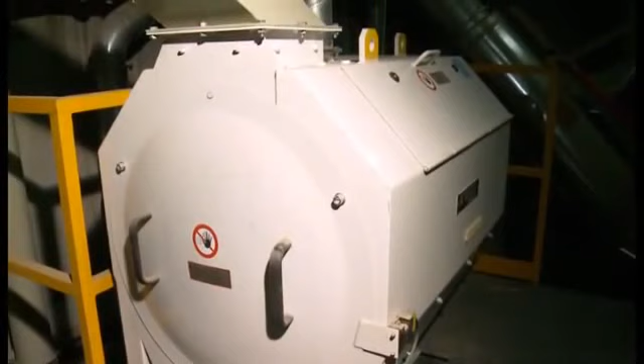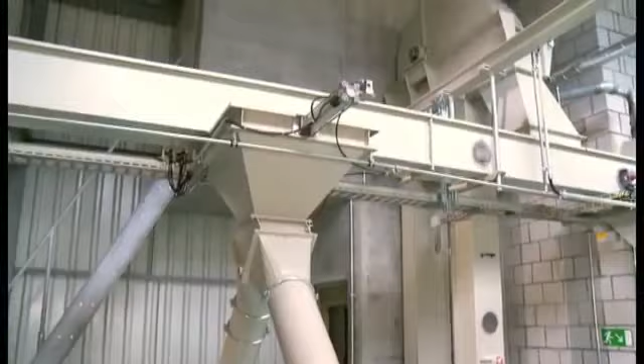...and weighed before being stored in the grain silo. Coarse impurities are separated by a drum sieve, and low-density matter by air in an aspiration channel. Then the grain is moved by mechanical conveyors, such as elevators and chain conveyors, to the appropriate storage bins.

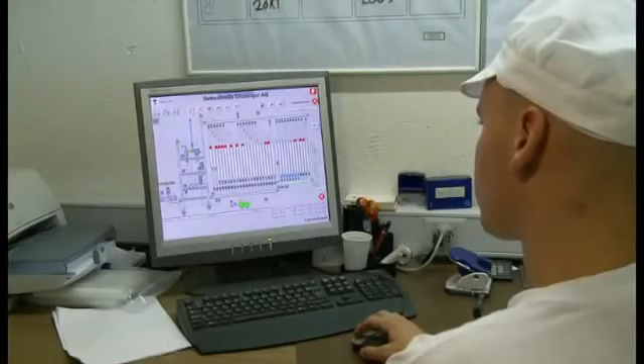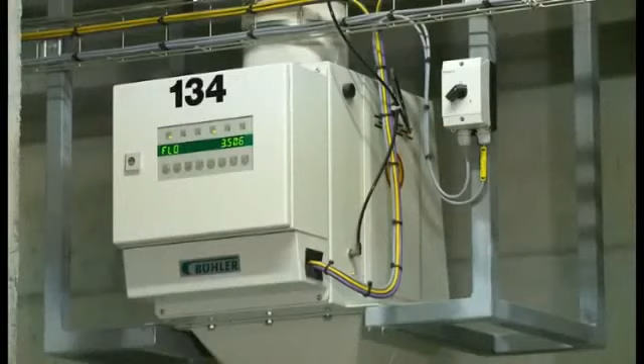The two grain silos together have a storage capacity of 12,000 metric tons. Grain storage is controlled and monitored from the control room. The different grain varieties and qualities are extracted from the raw grain bins at a controlled rate by flow balancers and then blended. This process is enormously important because it allows quality variations in the grain to be evened out.

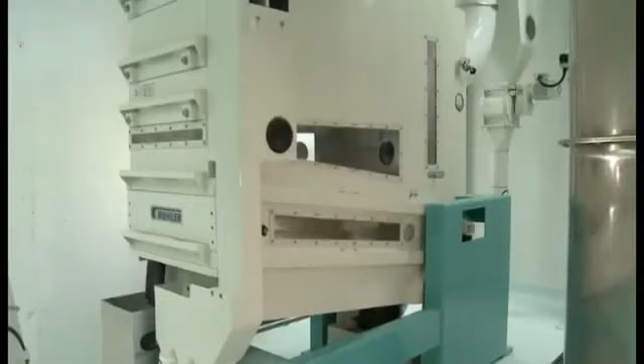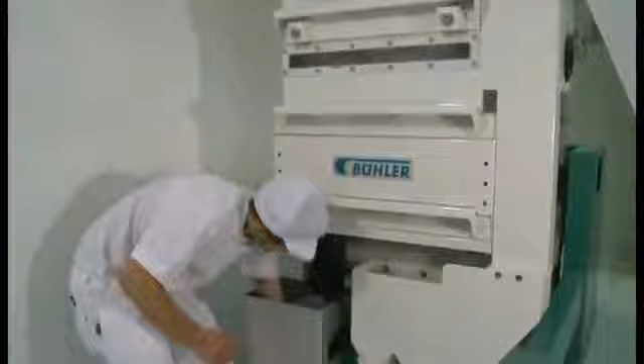The grain blend is then subjected to intensive cleaning. The combi cleaner used for this purpose performs 4 operations: separation, grading, removal of stones, removal of low-density matter.

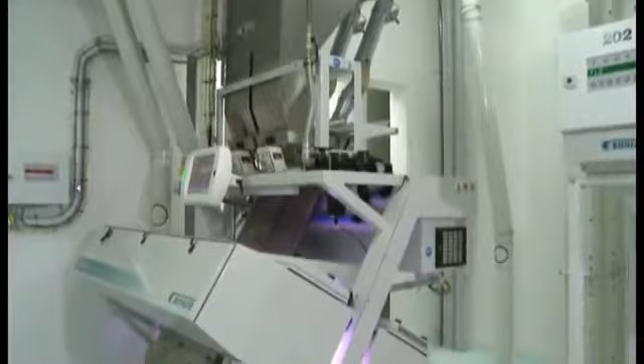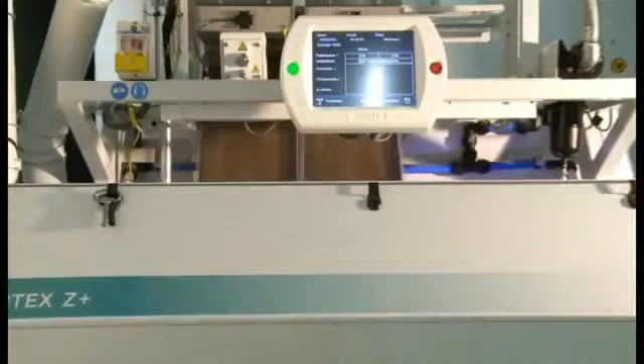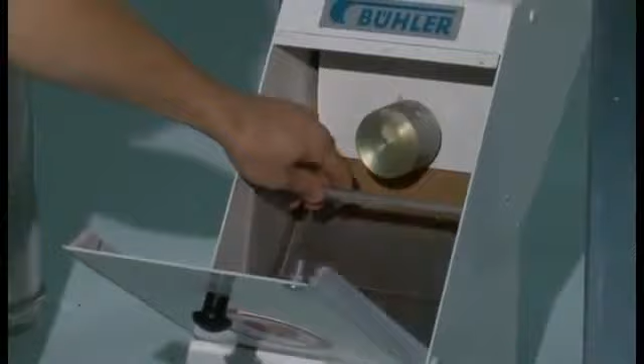Another very important grain cleaning machine is the optical sorter from Buhler Sortex, which is equipped with cutting-edge camera technology. This allows it very efficiently to separate impurities whose colour and surface appearance differ from the main product, for example other seeds or grains with discoloured germs. In addition, magnetic separators retain any metal particles so that they will not reach the grinding system.

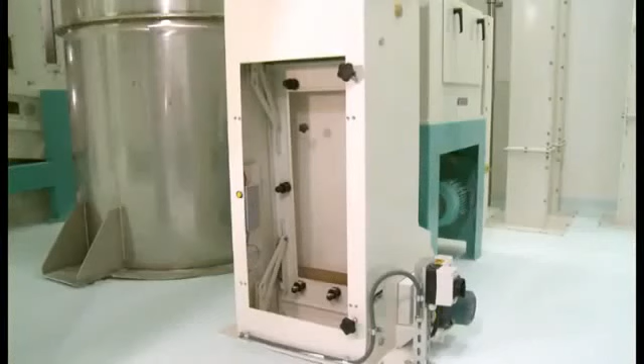Before grinding, the grain is dampened to a moisture content of about 16.5% to create the best possible grinding conditions. In order to allow the water to disperse uniformly throughout the individual grains, a tempering time of up to 36 hours is required, depending on their hardness. After final scouring to remove detached hull particles and another weighing cycle, the conditioned grain is transferred to the grinding system. All the equipment is controlled from the control center inside the mill building, from cleaning and grinding to storage in the flour silo.

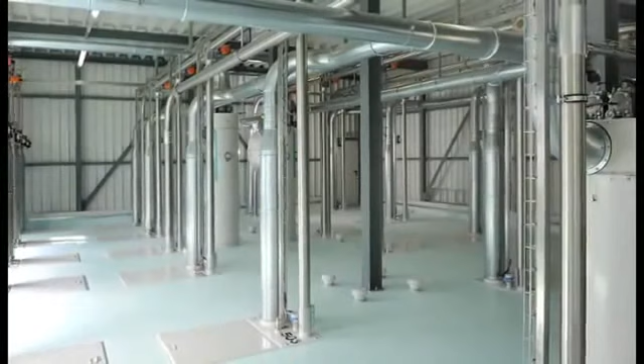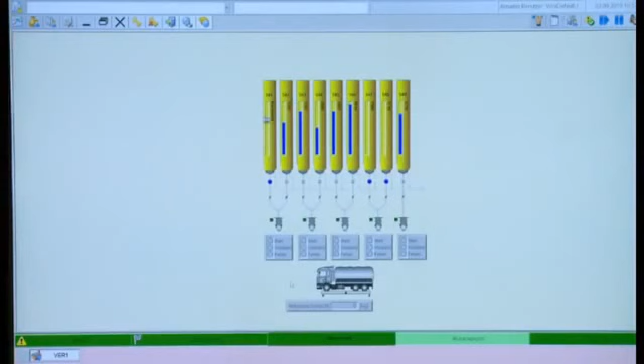The WinCos R2 process automation system used for this purpose is matched to the needs of the mill. It fulfills the high control and monitoring requirements of the plant. The processes are visualized on a display screen. They can, whenever necessary, be viewed by the miller and be adjusted to suit the job being processed. WinCos R2 also ensures 100% product interlocking, ruling out undesirable product cross-contamination. All the job data is saved in the system for several months. This allows accurate product retracing from the grain silo through to the bagging and packaging lines.

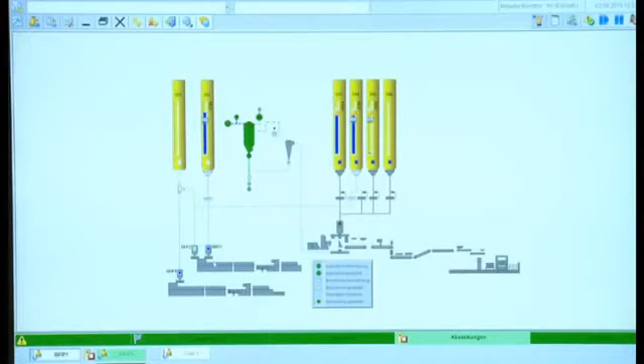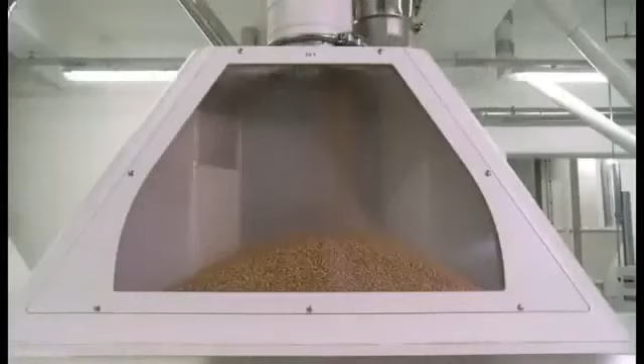The state-of-the-art roller mills form the heart of the mill. They are characterized by their round-the-clock automatic operation. In an initial grinding phase, the grains are cracked open on roller mills equipped with fluted rollers, resulting in a product mix made up of different particle sizes.

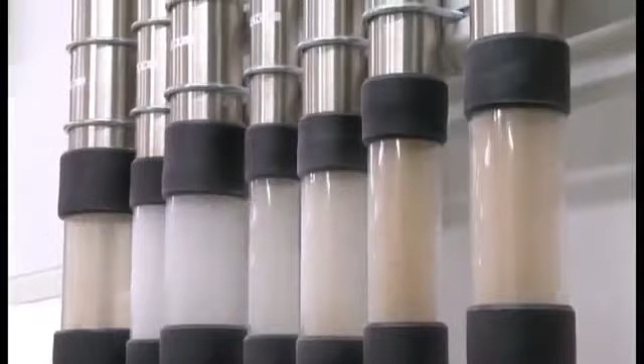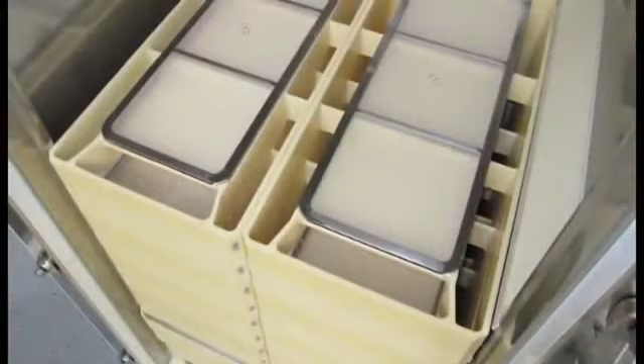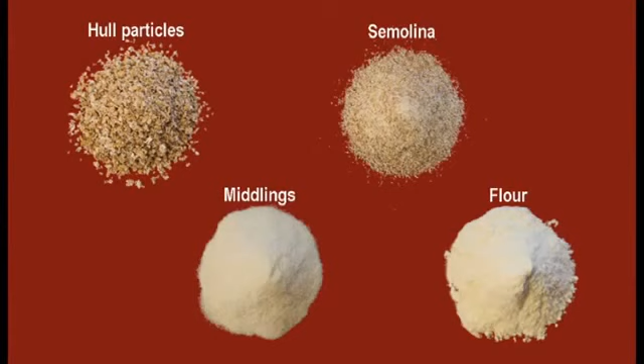After being pneumatically lifted and separated from the air by cyclone separators, the mix is fed to sifters for grading. Their numerous stacked sieves are provided with different mesh sizes. The sieves grade the product mix by size into different groups, such as hull particles, semolina, middlings, and flour. Using screens and air, purifiers separate the semolina and middlings a second time into a pure group and a group containing hulls.

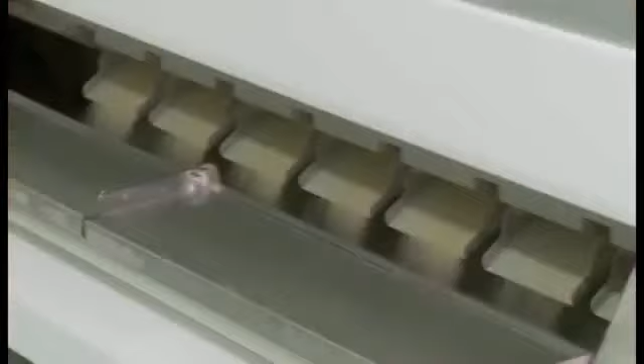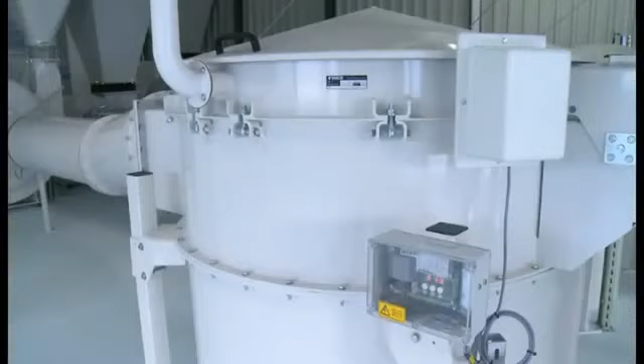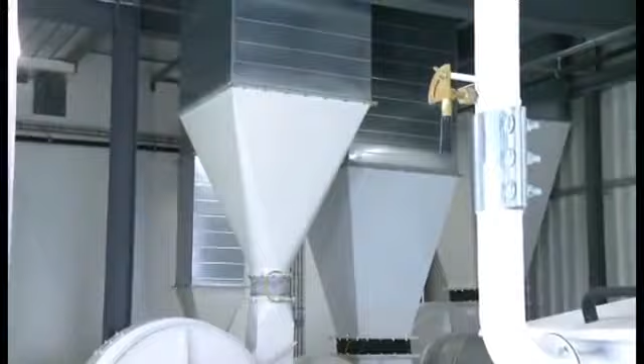The pure semolina and middlings are directed to additional roller mills equipped with smooth rolls, where they are reduced to flour. The hulls, which are called bran, undergo further processing into animal feed in the adjacent feed mill. High-efficiency dust filter systems clean the process air, which is discharged into the atmosphere or back into the building. Silencers allow the air to be discharged from the building with little noise.

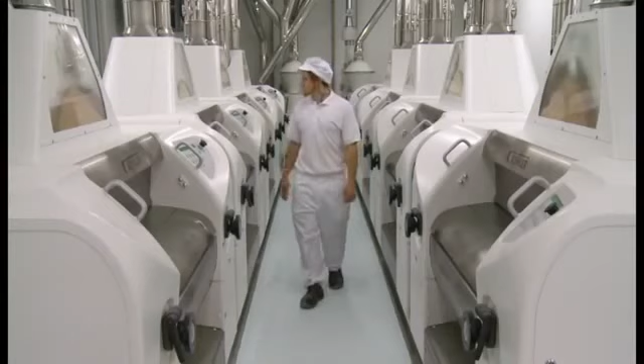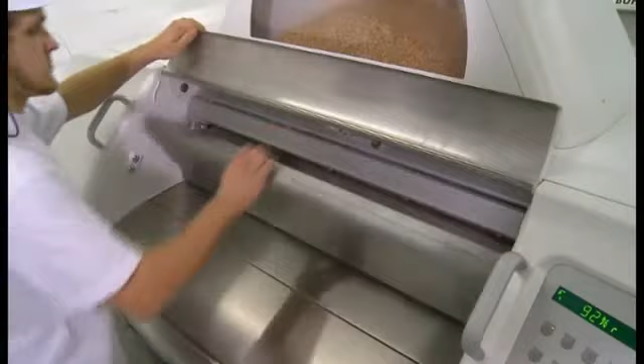The fairly complex grinding process is made up of numerous different stages. It is the miller's task to apply his specialist skills and to adjust the grinding equipment so that the grist yields a high extraction rate of bright, speck-free flours. He must also correctly blend the millstream flours obtained during grinding so that they will satisfy the end product requirements and quality characteristics.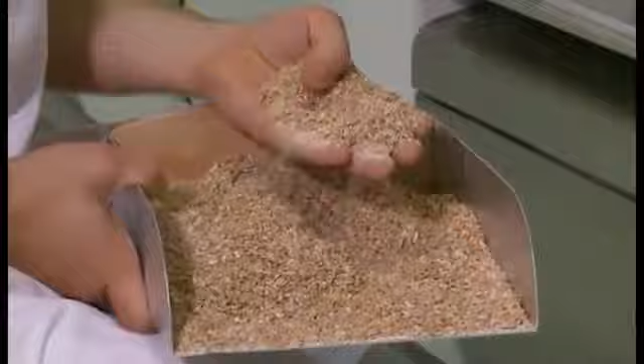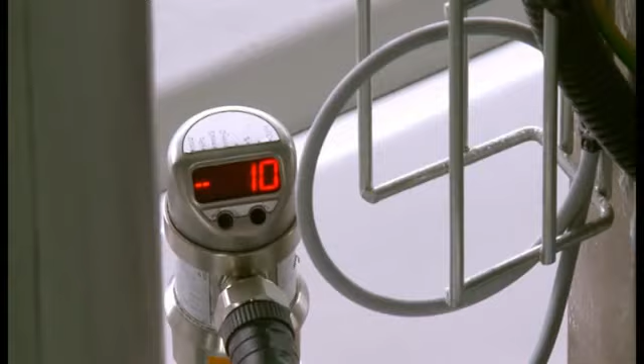Moreover, he must match the grinding process to the varying quality characteristics of a natural product, grain, in order to ensure round-the-clock, trouble-free production. This requires expert adjustment and checking of all the equipment in the plant. A large number of detectors and sensors on the machines are essential for ensuring smooth and automatic plant operation.

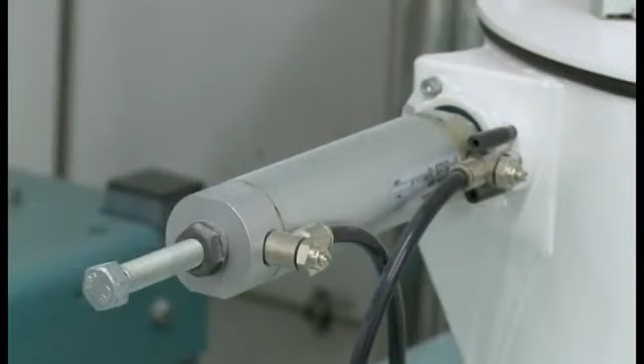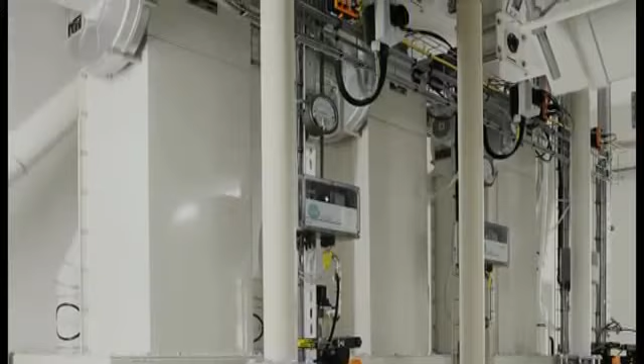At the end of the grinding process, electronic scales transmit the flour weight readings to the yield calculator. This unit provides a permanent overview of the finished product yields that have been achieved. Then the flours are pneumatically conveyed to the appropriate finished product bins. Subsequent homogenization ensures that the flours have a uniform quality.

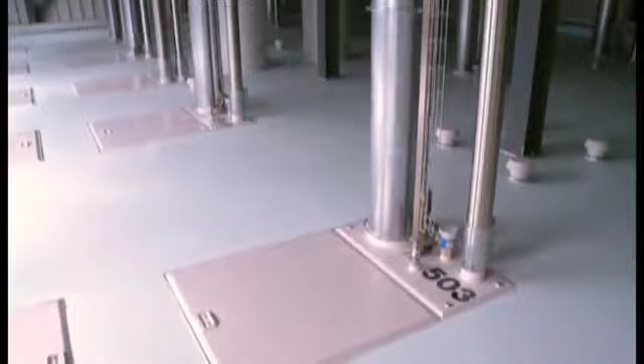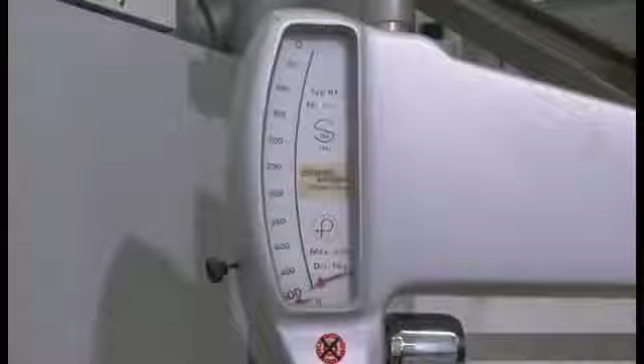Samples are automatically and continuously drawn for careful analysis in the company's in-house laboratory. After all, customers must be able to rely on a consistently high quality of flour. To ensure this for the future, existing and new product formulas are tested and improved in the test bakery. Customers can thus be given the best advice.

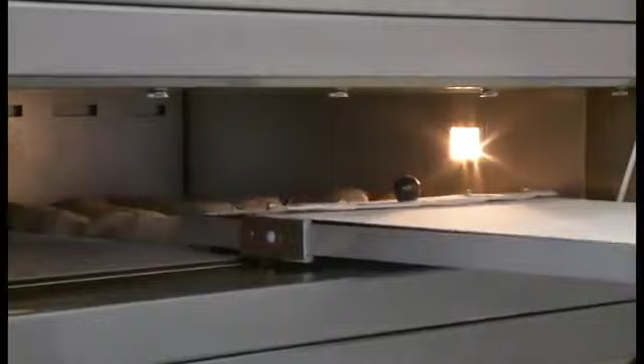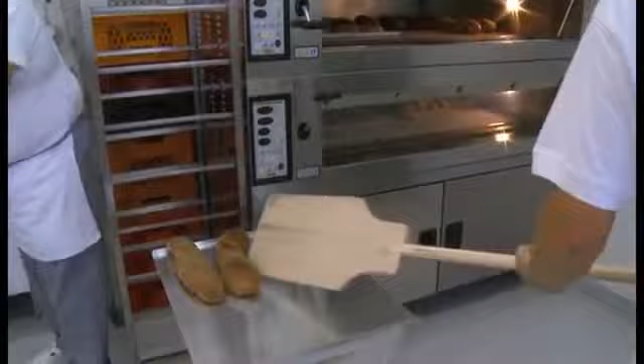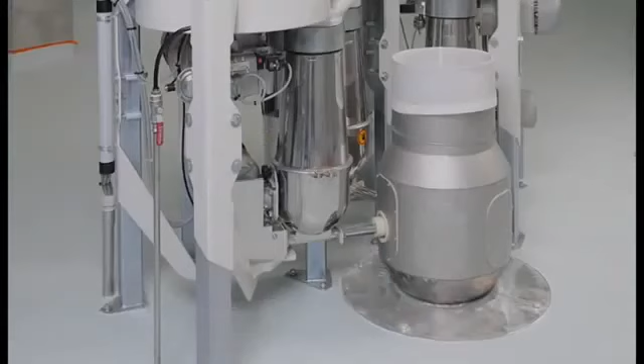The mill must satisfy the wide variety of demands for special bakery blends from its many different customers. For this purpose, the flour silo is equipped with a batch blending and mixing system. It enables natural additives, such as vitamins and flour improvers, to be added to the finished flours at an accurate rate in order to meet customers' specific needs. This further improves the baking characteristics of the flours and thus enhances their value.

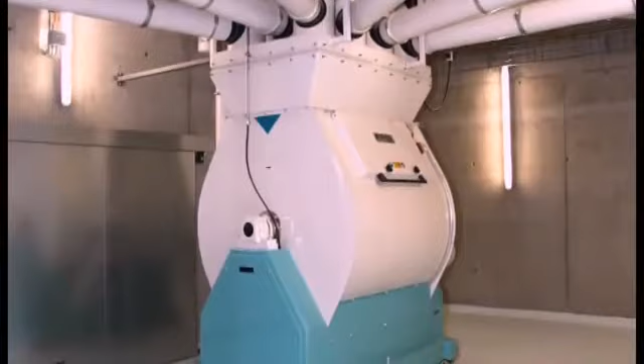The batch mixer, with its outstanding mixing efficiency, disperses the additives in the individual flour types with high accuracy, even at high throughput capacities and very small addition rates. Depending on the specific order, the finished flours are transferred directly to the bulk outloading...